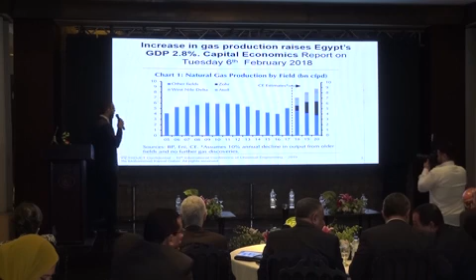Capital Economics has estimated, on Tuesday 6th of February, that the GDP is going to have an increment up to 2.8%. For those of you who are not familiar with GDP, it's gross domestic product, indicating the consumption and exportation of a certain industry.

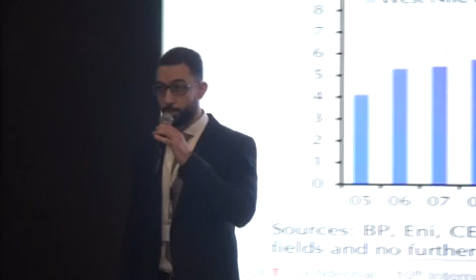Also, Capital Economics has estimated that we are being blessed by new discoveries and new production, which is going to be almost doubled, from 5 billion up to 9 billion.

This could be good news for you, but I will not say sad news, it is worried news. Because if you have been awarded your fortune, you will be spending all the night thinking what I'm going to do with it to have the greatest benefit.

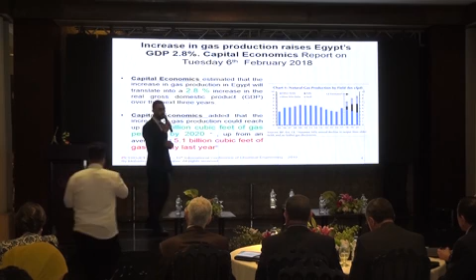So we will need an effective solution, not just an efficient solution, because of the difference between efficiency and effectiveness. Efficiency is doing everything the right way, but effective is doing only the right thing.

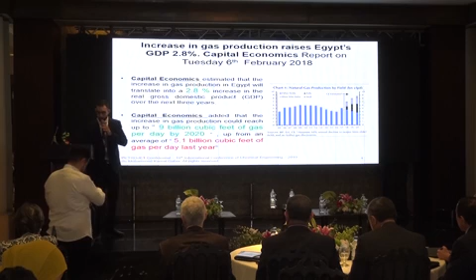This takes us to an introduction to gas early production. Before going to the EPF, we need a small introduction, very simple, about the gas itself - its composition, its definition, its classification.

It's a mixture of hydrocarbons, of course, between hydrogen and carbons. It could have some components.

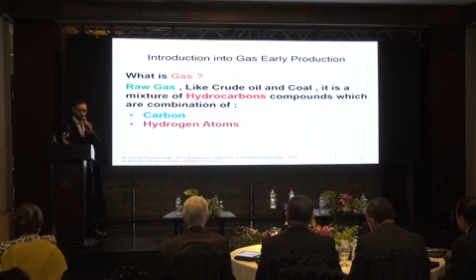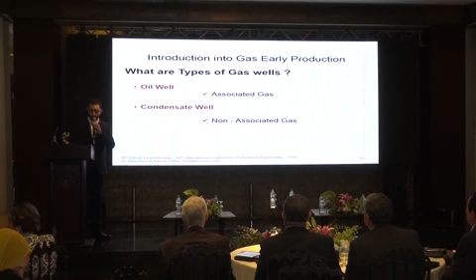I have to also go through the types of gas wells: oil well with associated gas and condensate, well with non-associated gas, and gas well, pure gas, and also non-associated gas.

Examples of hydrocarbon components could be CH4, C2H6, and C3, and then going down to the lower and heaviest components, which are C4H10 and IC4. The gas could be classified into sales gas, LPG and LNG, and NGL, and condensate and removed substances.

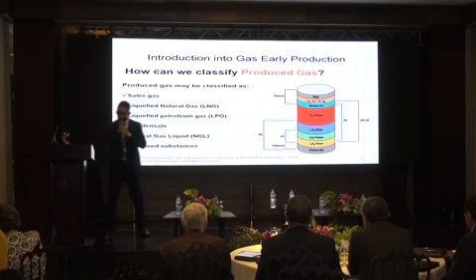The main gas components could be principal components, which are CH4 and C2H6, and heaviest components, which are propane and butane. I'm reviewing these items because I will need them through my presentation, to show how I'm going to separate these light components from the heaviest components in the most economic and fastest track.

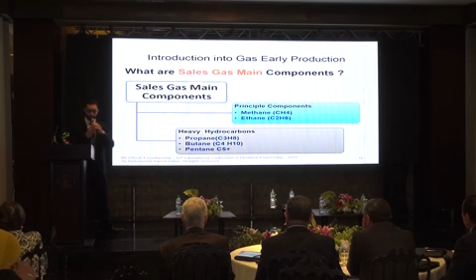Gas processing is simply separating the heaviest from the lightest, to produce what is known as sales gas as per the client specs.

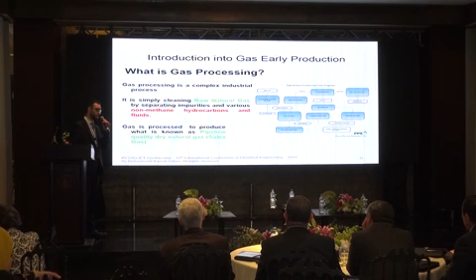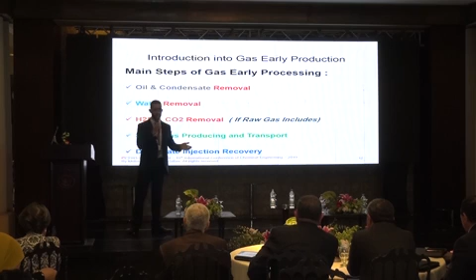The main steps are oil and condensate removal, water removal, H2S and CO2 removal if your gas is sour gas, and then sales gas production and transport. Of course, dehydrate injection and recovery - all of you, I think, are familiar with the hydrate formation problem which we face when processing and treating our gas.

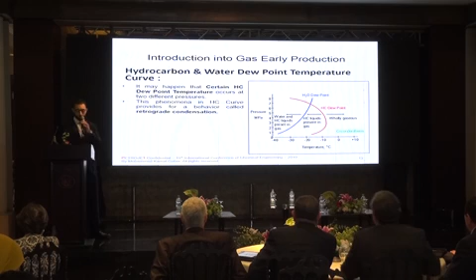We will need to know and define certain items before going through our presentation, which are the hydrocarbon and water dew point temperature curve. This is a curve, and I think it is familiar to all of you. The red one is the hydrocarbon dew point, and the blue one is for the water.

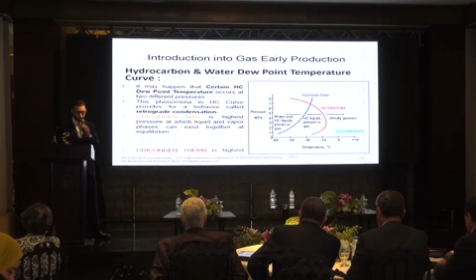There is also the cricondenbar, which is the highest pressure at which liquid and vapor phases could exist together at equilibrium. And the cricondentherm is the highest temperature at which liquid is formed.

Because if you are having many wells, you will not be spending your money to invest in a central process facility. This central process facility could cost you a lot of time, a lot of money, and then these wells could cut off immediately.

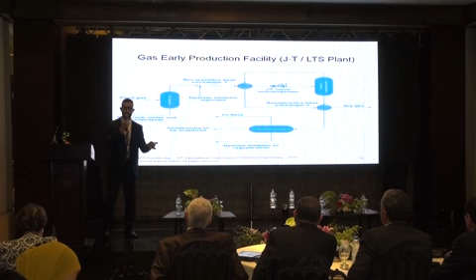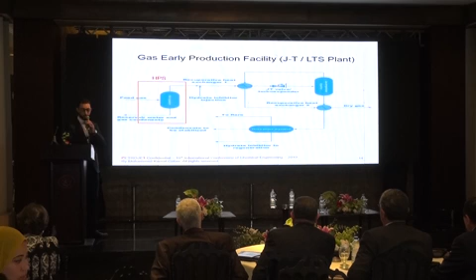So we are gathering some equipment which are skid mounted, as we see. High pressure separator here, then injection point for hydrate inhibitor, and then we are having our JT skid.

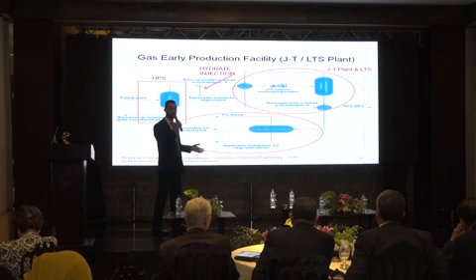JT skid, if you are not familiar with this item, stands for the Joule-Thomson effect. The Joule-Thomson effect is an expansion valve for making the gas suffer from higher pressure drop, and at this moment it will suffer from higher temperature drop, and then you will be able to separate the lightest component from the heaviest component through the low temperature separator.

And also you will have this heat exchanger which could be working for both targets: heating the separated heaviest components and also making the temperature of the gas reasonable and matching with the EGPC gas specs.

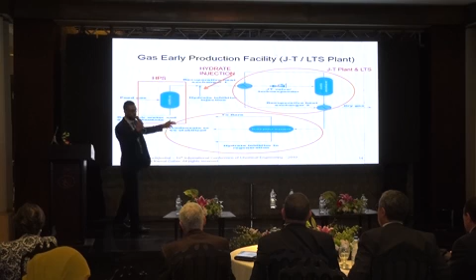And then you are having the low pressure separation here for separating the heaviest components, and then to have the hydrate, which is mixed with water, re-injected again on this injection point, and then flaring a little amount of gas.

Then you will have your dry gas. This takes us to a case study which has been done through the Unisim software.

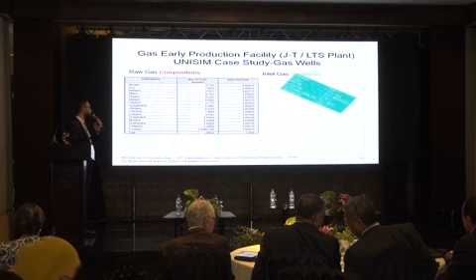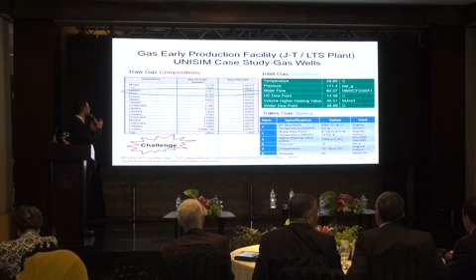These were the composition of our gas, as we see here, and these are the conditions, and the sales gas which were required by the client, as we see here. Our challenge is to separate these light components, methane and ethane, from the heaviest components here, and also to transport these conditions to the required specs.

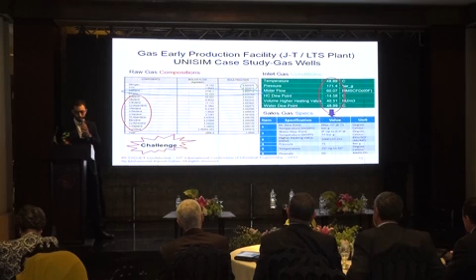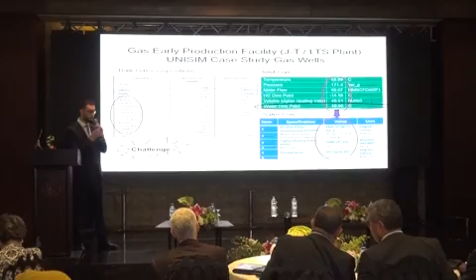The main target here, as we see, is the dew point temperature of the water, which is around 50 degrees Celsius, needs to be transferred to around 0 degrees Celsius. Also keeping in mind to have the heating value as it is. So let's do this together.

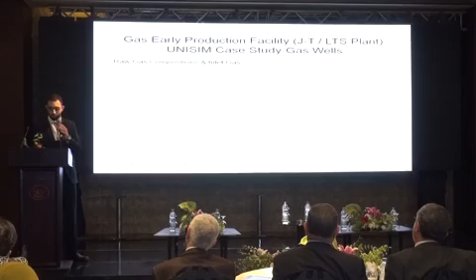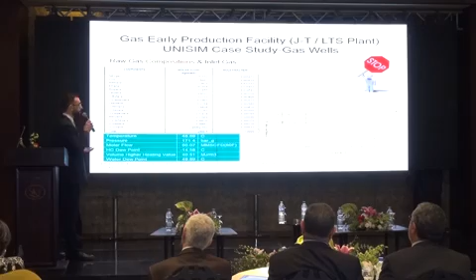These are the conditions and the compositions. This is our figure, but keep in mind that this figure was considered on the dry basis, so we have to do some saturation with water to make it more real.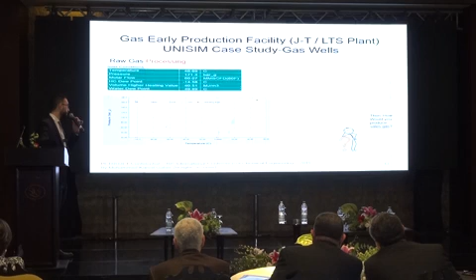So how are we going to produce the sales gas? Firstly we will remove the heavy components, then we will remove water and prevent hydrate formation, and then you will produce sales gas. We are going to do that by having this point inside the curve itself to create a two-phase flow, so we can separate the heaviest from the lightest, and then bring the operating point back outside, as we see.

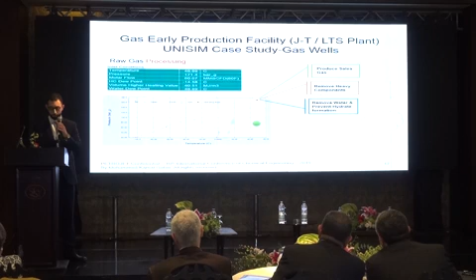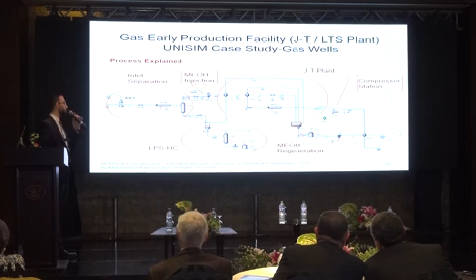So how are we going to do that? This is our process simulation, which is composed of inlet separation, and then you are having methanol injection, and you have your JT skid, and then you have your compressor station.

The reason why we are having our compressor station, as I mentioned previously, is the main phenomena of the JT skid is to make the gas suffer from higher pressure drop. So that you lose your pressure, so you will have to use a compressor station to be matching with the sales gas specification. And then we are having a methanol regeneration to be re-injected.

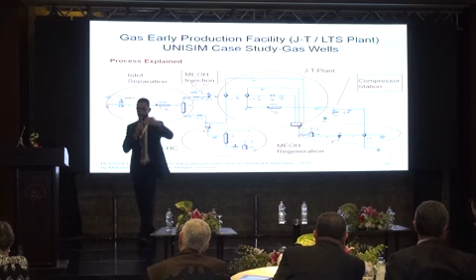And also we are having our heavy components, which has been produced through the high pressure separation, and also through the low temperature separation. They will be gathered, and then they will be separated again, and then trucked to be treated furthermore.

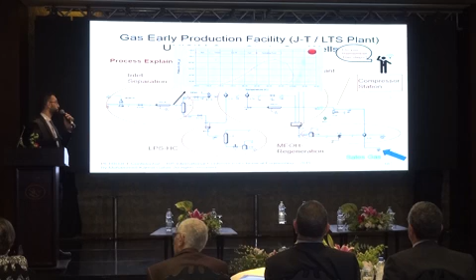This is our formation temperature for the hydrate. It's around 18, so close temperature.

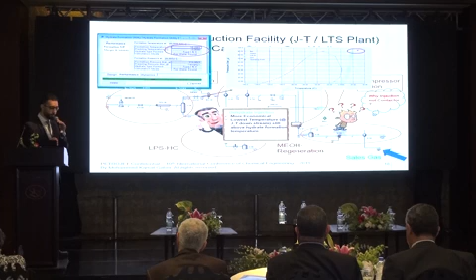For that, we are going to do the dehydrate injection. We used methanol because it is more economical, and the main reason is the lowest temperature at the JT downstream is still above the hydrate formation temperature. As we see here, it's around minus 0.11, which is higher than minus 11. So we will not need a heater.

And also we will need the methanol. A question might come to mind: why are you using methanol, not ethylene glycol, because it is the cheapest one? I will not say cheapest - I don't like to use this item. Methanol is more economical for re-injection and also for ice freezing, anti-freezing, and also cheaper for regeneration.

As we reviewed together, we are having inlet separation and methanol injection. After doing the injection, our curve turned to be like that. As you can notice, our operating point turned to be away, but in fact the operating point is the same. The curve itself has been shifted to the left side. Sorry for that.

Our formation temperature tended to go from 18 down to minus 3 Celsius degrees.

Our JT skid, in fact, is formed by two heat exchangers having these specifications, and also a JT valve having this specification.

Sorry, I'm going so fast because I know you are not interested anymore in my presentation. You are hungry now. I'm also hungry.

This is our low temperature separation, which has these specs. Some features from our Unisim design software: it has quick sizing, so we could figure out the size of it, the volume, the diameter, the length, and so on. We also have the boot and the weir, the position and the physical height.

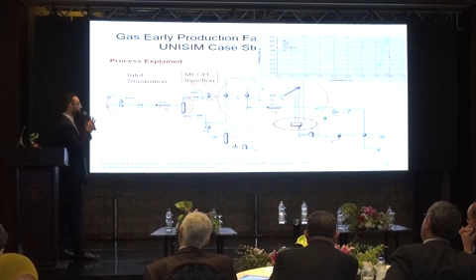Then our curve turned to be like that. If you could notice, your operating point got into or inside the curve itself, but this is not enough. You have to do separation.

After doing the separation, you have your heaviest component, which will be separated through a low pressure separator hydrocarbon. These were the molar flow of them, and these are the compositions of them.

This is your operating point, but this operating point is not for the gas. Can I ask you a question, please? This operating point, is it for the gas or for the liquid? Because I fear that you have lost your attention.

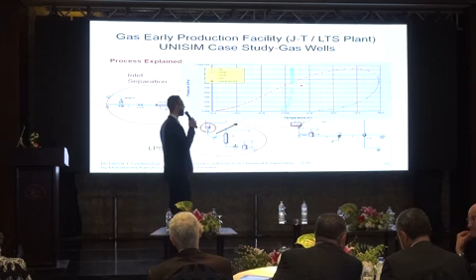I think this operating point is for the liquid itself, it is not for the gas, so it is on the left side. After that, you will be doing a separation for it. Yes, it is inside the curve, of course.

So I will do some separation by inserting a low pressure separator around rating 150 for the flange. You will have your point outside the curve, so you have it in liquid form. You can transfer it by trucks, pipeline, or whatever facility is available.

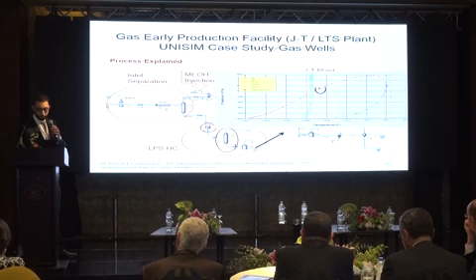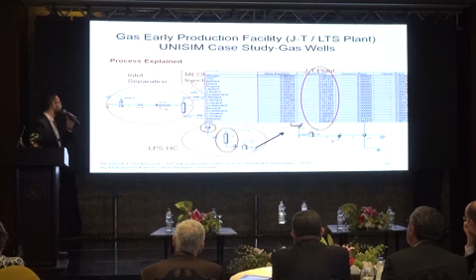Then let's go back. These are your mass flow rate, and this is your composition, mainly composed of methane and ethane. If you could notice, what is our main concern here? Our main concern is to look for... sorry, come back.

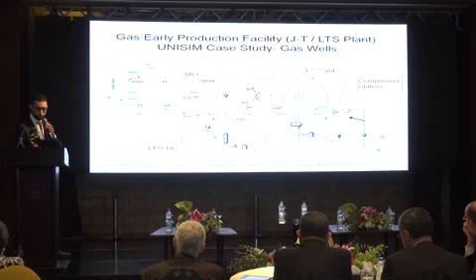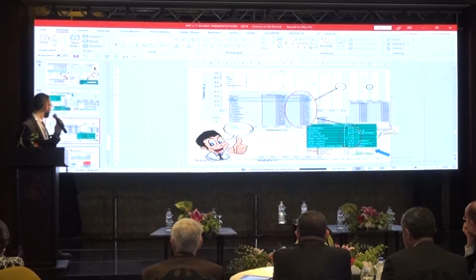We are reviewing together.

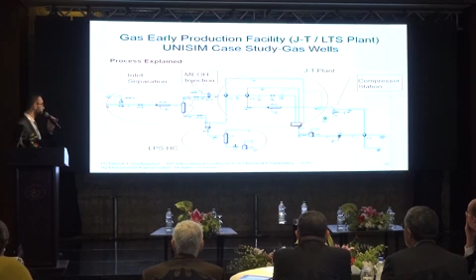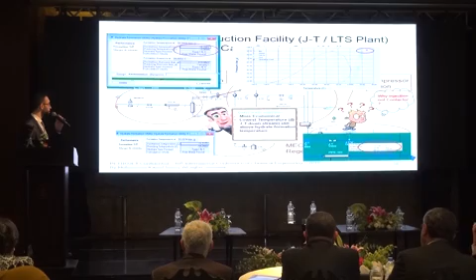Okay, move forward. Then you have your hydrate, and then...

Everyone is sleeping now, right?

Okay, we moved through this, and we have our injection and dehydration.

Mohammed: Yes, go to the conclusion directly. Okay, I will. Sorry for that, but I'm just trying to make my point as effective as possible.

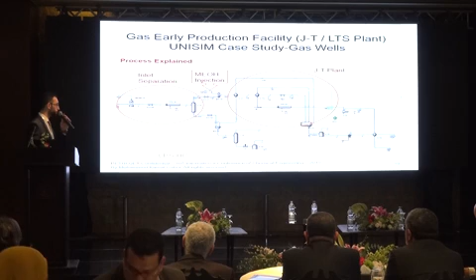This is our operating point as we reviewed together, and this is our composition and conditions. I know it is more technical, but I wanted to make it more beneficial for you because I know that most of you are chemical engineers. That's my point, I'm not just wasting time.

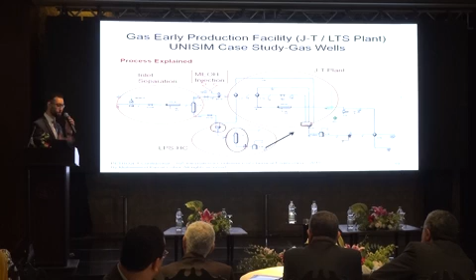Nobody believes that you are a mechanical engineer. We thought that you are a process engineer. Yes, I have a master's degree from India in piping engineering. This is why I'm interested in that.

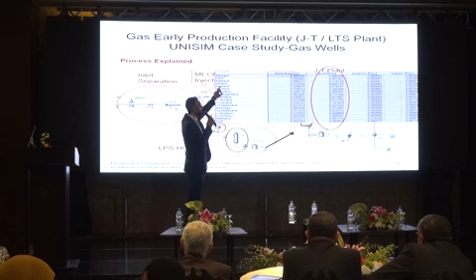These are the compositions. What I was going to ask you, what is your main concern here? I think we could be looking at the ethane and methane composition. As you see here in the liquid phase, you are having very low composition, that means your liquid is already separated.

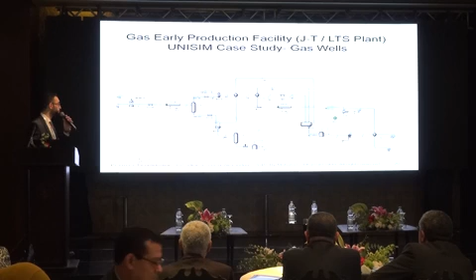Then, this is your point which we were talking about, still very close to the curve itself, so you will need to do more heating or reheating the gas. It will be through heating. This heat exchanger, you will have your point in this position, which is outside the curve.

But still, these conditions do not match with the specs of the EGPC. So you will need to do out of spec, you will need to do a compressor station.

After doing the compression, you have your operating point around 3.5, and then your pressure is around 73. Then the methanol regeneration, as we see, the temperature is very low and the pressure also is not matching.

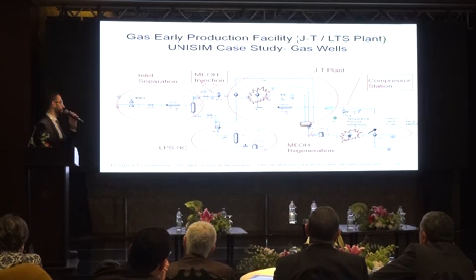So we will need to increase the temperature, and at the same time you will need to cool the gas. Instead of having a cooler and a heater, we use the heat exchanger here to do both functions at the same time. This heat exchanger then gives you your composition in the aqueous state.

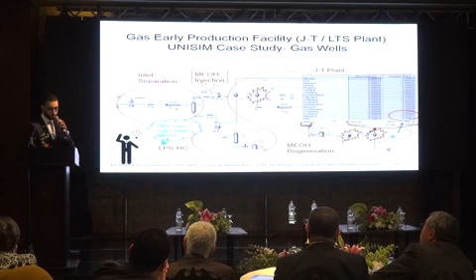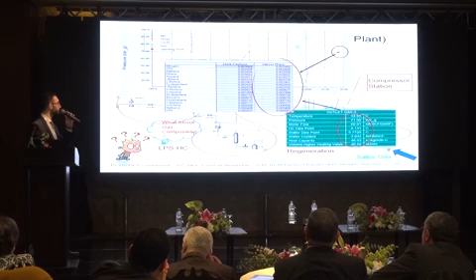And then you are having your sales gas with these conditions as we see: temperature, pressure, molar flow rate, and this is the operating point. You need to check for the gas composition, it's okay. 93% is methane. Finally, gas is on spec.

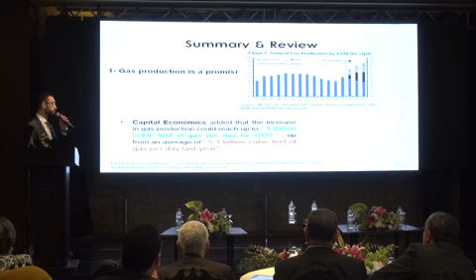I'm just summarizing and reviewing my presentation. We have reviewed together that the gas production is a promising industry in Egypt. As the Capital Economics has estimated, we are being blessed—our production is almost doubled. I also had an introduction on the gas processing.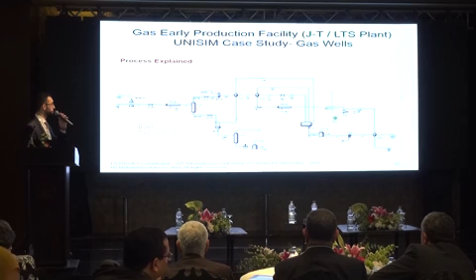We have reviewed this figure together, and we have reviewed also the main components and equipment for the gas early production facility. As we see here, we have also reviewed our process, and we had our gas. I'm just trying to review with you.

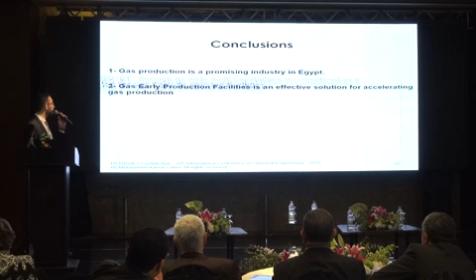The conclusion: gas production is a promising industry. Gas early production facility is an effective solution for accelerating the gas production, and Petrojet, through its wide multi-capabilities, is considered a one-stop shop for gas early production facility. Many thanks for your attention, and these are my contacts.